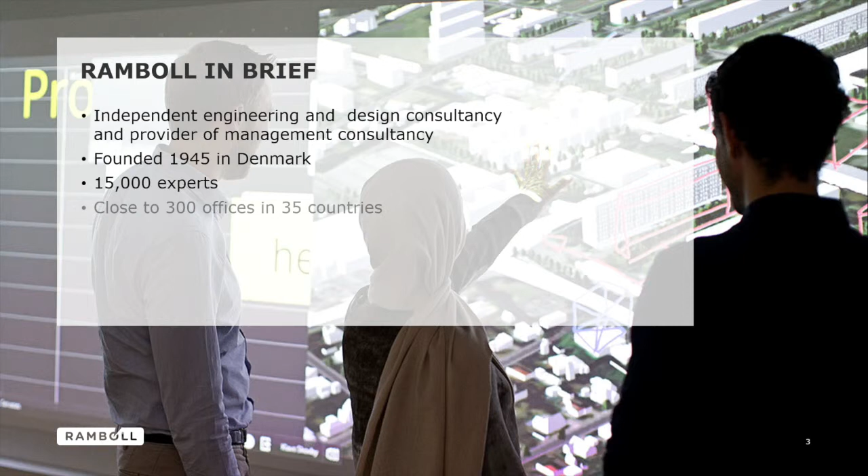So a quick slide just about Ramboll. I'm going to skip through these. We are a Danish engineering company. We do all things engineering, but one thing that we have been privileged to be able to do is work hand in glove with Denmark and with various municipalities, particularly Copenhagen, in helping develop the district heating system that they have over there that we are obviously so jealous of. So it's been going over there for many years. So I'm going to try and bring a little bit of that slant to the UK situation, and then a few projects that hopefully will give you some encouragement and then some challenges.

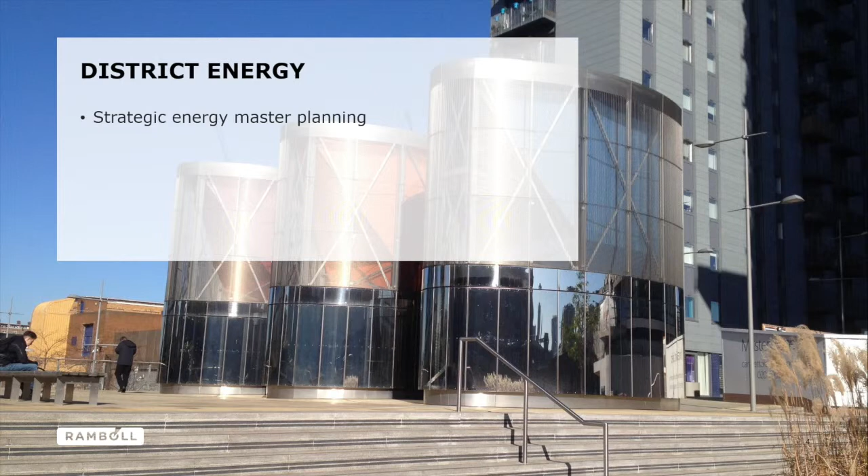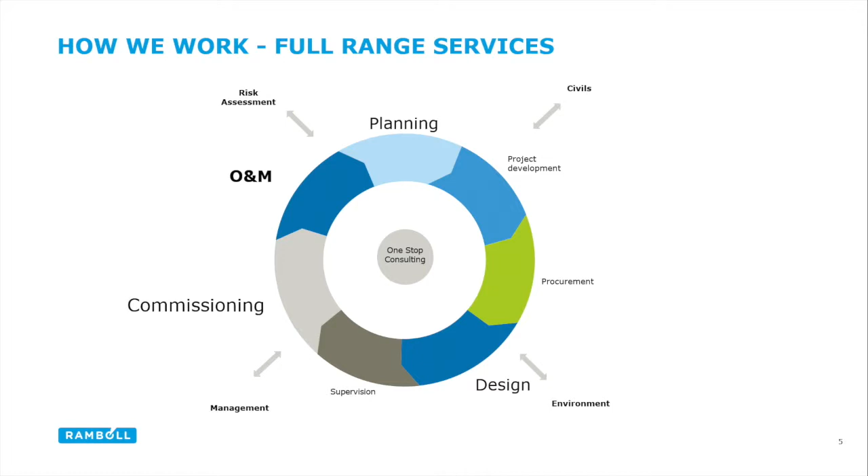And as I said, we do lots of different types of related subjects around energy, but I'm specifically focusing on district energy and particularly district heating. And last slide on the company, because we've been doing this for many decades, yes, we can do the planning that's quite common over here now, energy planning and design work and commissioning, but we also have a particular strength on O&M, and I would always encourage you to think about the operation of schemes right at the very beginning. So that's the sort of holistic service that we provide.

Now, this is my only slide from our corporate PowerPoint pack on all things district heating in Denmark. You'll be pleased to hear we have a lot. But the reason I put this one up is I think it tells pretty much the whole story of what's been happening and what is projected to happen in Denmark relating to decarbonisation and district heating. So you have the timeline starting around 1980, moving forward to 2050. And the black line is the one I'd like you to look at first. That's the amount of carbon per unit of heat used by an end user customer. You can see in the past it was high, and in the future it's nearly at zero over in that bottom right corner. They too have the same challenge that we have about squeezing out that last bit of carbon. But you can see how the line has plummeted and how it continues to drop.

And then the colourful bars show you how the heat is being delivered. The important colours there really are the blue, and that's the large-scale district heating, and a little bit of pink appearing as you go into the future, which is what they call small-scale district heating, which is probably akin to a lot of the ad hoc projects that we're delivering here. So I think there's a pretty clear pattern there showing achieving and projecting decarbonisation and district heating very much playing its part in that. And the last thing to draw your attention to is the light blue that appears around about now going forward, which are individual heat pumps. If any of you are aware of our government's heat strategy, where they have a kind of simplistic diagram of high heat density being met by district heating and low heat density areas being met from heat pumps, there you can see the same picture emerging in Denmark as well.

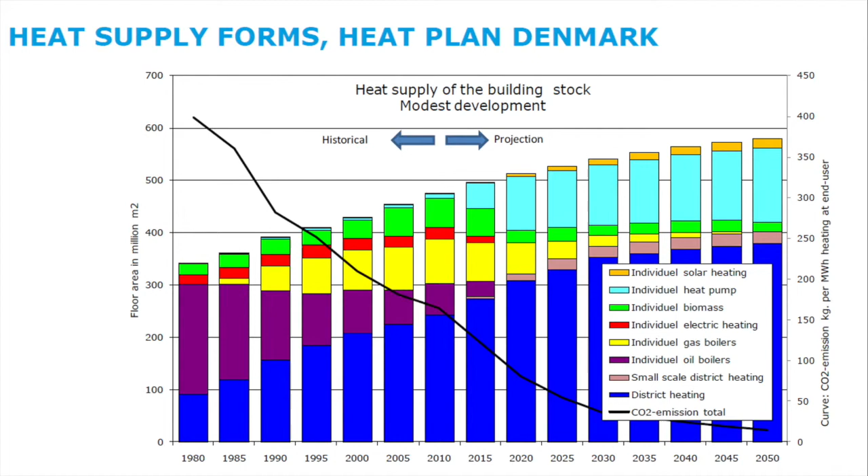So my next couple of slides are around particular projects. And one of them is in Copenhagen. As I said, we're headquartered in Copenhagen. In fact, this is the answer to the question: can we achieve 17%? The eagle-eyed of you in the audience will see 97% there, which I've highlighted in our corporate light blue, so you can't really see that. And that is the degree of district heating penetration in the city of Copenhagen. So yes, you can achieve at least 17% and more. You just have to commit to it, and it does take a bit of time, but it is completely doable.

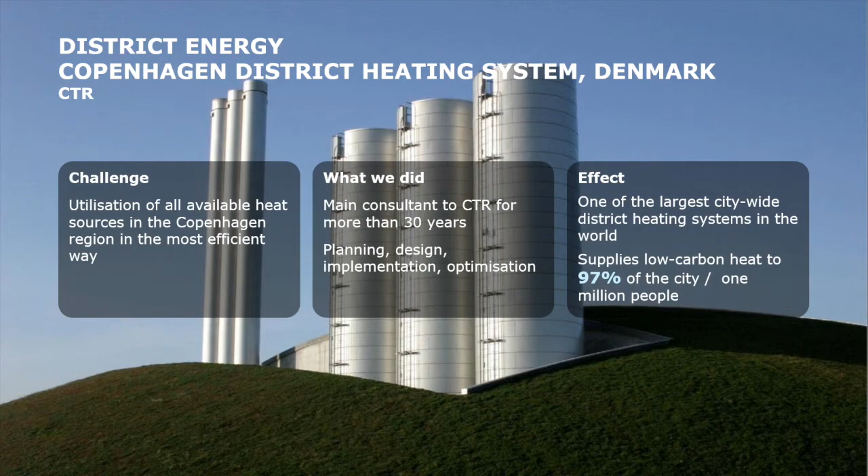This is the only slide I have up of projects in Copenhagen that we've been doing recently. There are obviously many, but I like this one in particular because I think this tells a story that we in the UK can wrap our heads around.

So there is a temptation to say, look at the Nordics, everything's fantastic. Everybody sits around drinking flat whites and wearing funky clothing and having a lovely time, and the world's wonderful. Just do that. Just build that. And if you talk to Danes and Swedes, etc., they say, well, just do this. But that's a really hard task. And how do we start, and where do we take it from?

Now, this is a project. It's just about 15 kilometres outside the city of Copenhagen. They've recently built a new fruit and flowers market, so I suppose a bit like Covent Garden, new Covent Garden here, and that market requires chilling. So they've put in chillers. They've got about 2 megawatts of cooling there, so again, numbers that we can understand.

These aren't massive pieces of infrastructure, and that does its thing, and it's very clever, and it's got tiers of, as it warms up, it supplies warmer areas of the markets. It's all very well designed. But the clever bit, as far as I'm concerned, is what they do with the rejected heat off the back of the chillers. So the left-hand side represents the cooling side of the system,

and then they've bolted on heat collection and heat pumps onto the hot side, and then they lift that from around 16 degrees up to the transmission system temperature, and off it goes into those red lines on the map there of the transmission network in Copenhagen. And it's just over 3 megawatts of heating. So again, nothing massive. It's a sort of scheme that we have done and we can deliver here in the UK. The waste heat temperatures are the sort of temperatures that we're looking at across the piece, and I'll come to that in a second.

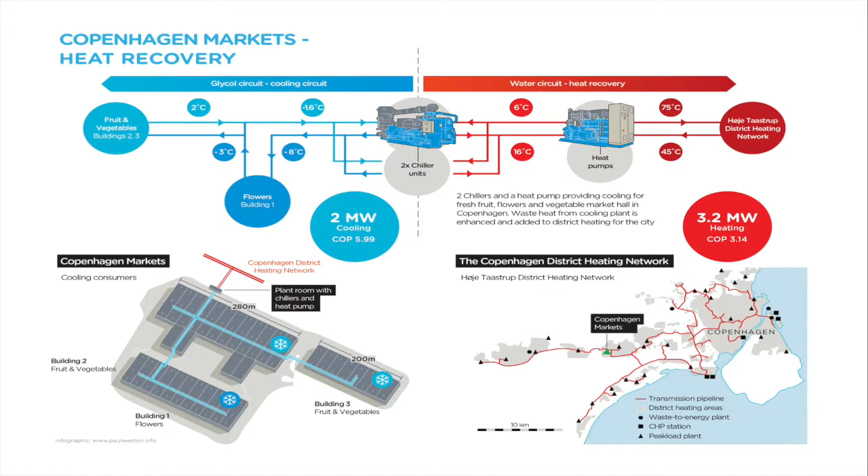I suppose what is revolutionary, though, is why they located the markets where they located it. They put it on the heat pipe so they could use that heat. So that joined up thinking happened right at the start, rather than having a facility and then you're trying to pipe heat to where it's needed. They have a network, so they have that advantage over us, but they decided to put this new piece of infrastructure there, so then it is relatively easy. So is that deliverable, and is that relevant to the UK?

Well, this is a fantastic study that, if those of you don't know about it, I would recommend that you have a look at. It was done by Buro Happold. I have no say in this at all, for the GLA a few years ago now, but it mapped all the secondary low temperature waste heat, available heat across the City of London.

This is a rather badly reproduced summary here of the sorts of places that you can get heat in London, and this is true for any city, a large town, even small towns have these waste heat sources, and you'll see chillers on there like at Copenhagen. You'll see the sort of temperatures, size of heat pumps that project represents. So this is very much available now, and people are starting to exploit it.

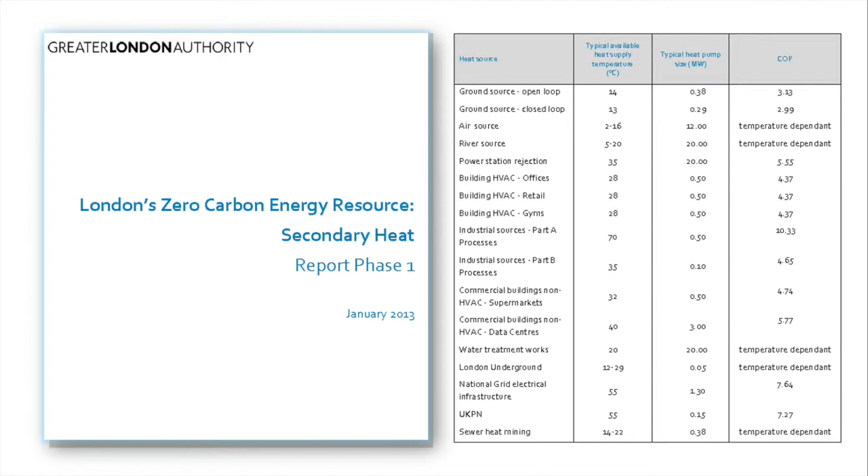And this is a project very close to my own heart. Those of you who know me know that I've been at Ramboll for about a year. Before that, I was at Islington Council. I am really proud to see they've got a stand here. I think they might be the only local authority here today, so go and look at the On Energy stand after this, see my old team. And at Islington, they've been looking at waste heat quite seriously, as well as district heating, for some years now.

And the phase 2 of Bunhill, they've got a lot of information there, is coming to the end of construction, and that will take heat from the London Underground, from the Northern Line, which those of you who have ever been on it know it's quite warm, and it gets very warm in the summer. Very complicated project, very ambitious project, but it's happening, it's being built.

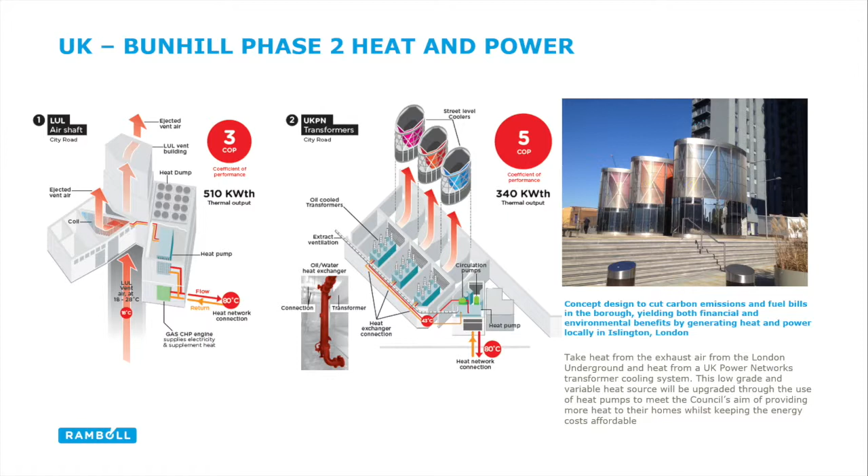Ramboll have been doing the engineering for that. They also have looked at UK Power Networks transformers. There were some technical reasons why that couldn't go ahead, but the heat provision was all there. It could have happened. They've been looking at the canal, data centres, boreholes, etc. So go quiz them about how you do that now in London.

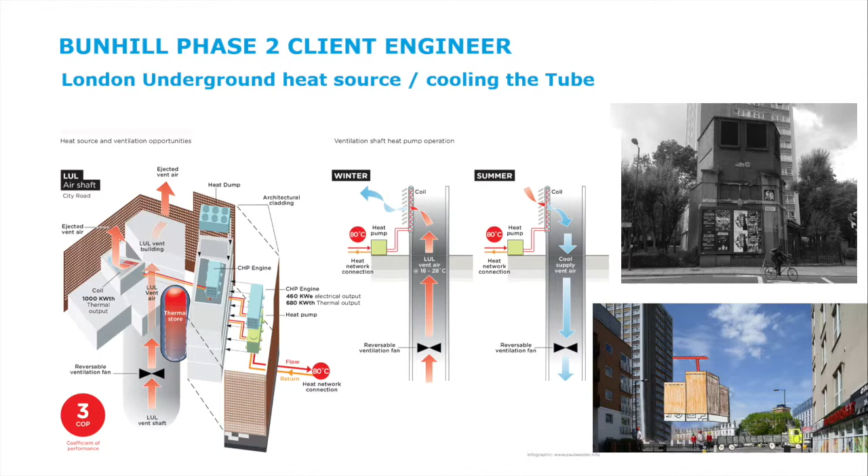and putting it in a pipe that's going off to a number of council and private sites and buildings, some perfectly traditional 1960s, 1970s UK housing stock, so having to meet all those demands. And hopefully in the summer the system will reverse and cooler air will be put into the London Underground. So obviously Transport for London very excited about that. So that project's happening just a few miles away from here.

And then another project happening a little bit further north is in Glasgow, in Queen's Quay, where we're helping them look at waste heat recovery, but using the River Clyde this time, which I think is a little bit colder than the Northern Line. I've never been in the River Clyde, I take their word for it. But again, as in the Nordics, using large heat pumps to take heat out of a water source. And that project, it's a bit earlier stage, but that project is underway.

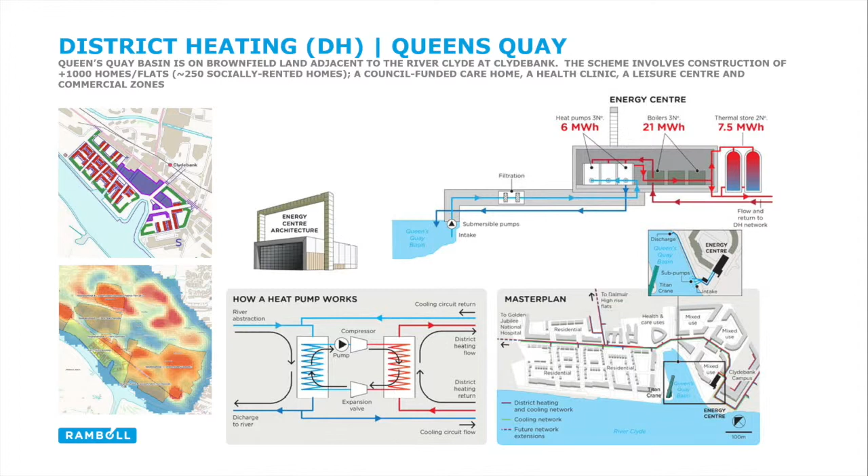So that's all the good news, that we're doing it and it's doable, and then a few challenges. So I'll come on to a few challenges. The first slide I thought I'd put up sums up a lot of what our challenges are, I think, which is the degree of individual gas boilers that we have here. People very, very happy with them as a heat source, and therefore, why move off them?

Huge investment in infrastructure in the gas network and all those boilers. And you can see, compared to a lot of our other European neighbours, the UK is way ahead. So we have quite a challenge in changing and transforming this infrastructure.

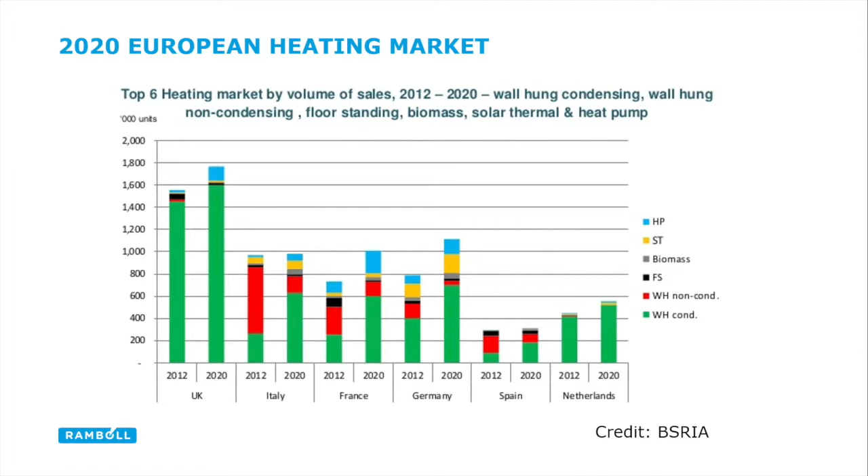And so I've summed up here four challenges. Actually, I think since I've written this, I've changed my mind a bit and I disagreed with myself. They're challenges, but they're also possible solutions. But in order of magnitude, I think this is for you to agree or disagree with and to continue through the session. But policy, I think, sits at the top.

Why has Copenhagen got to where they're going? They made some decisions about how they were going to provide heat to the country, just like we have here. But they made a decision to go for district heating, and they are where they are now. We have got some clear drivers in some parts of the country. The London Plan, for instance, has got a lot about district heating and has done for some years, and it's no coincidence that the largest number of district heating installations are here in the capital.

But it's not an integral part of urban planning, and it's not on an equal footing with other infrastructure. And I think until that happens, it's not going to be. And just to show, I think, the impact of that, just to duck out from that slide for a moment, those of you who, like me, have been around in the energy industry for a while will remember the transition from non-condensing to condensing gas boilers.

And for years, everybody was trying to persuade people to get really excited about condensing boilers. And it was clear as anything that they would deliver savings, they'd be cheaper for the householders, they'd save carbon, they were fantastic. But I think there's an inescapable truth that most people, us here excepted, are not at all interested in this. Most normal people, and I may be offending you all now, aren't the slightest bit interested really in their boilers or where heat comes from. They just want reliable heat and they want it to be as cheap as possible, please.

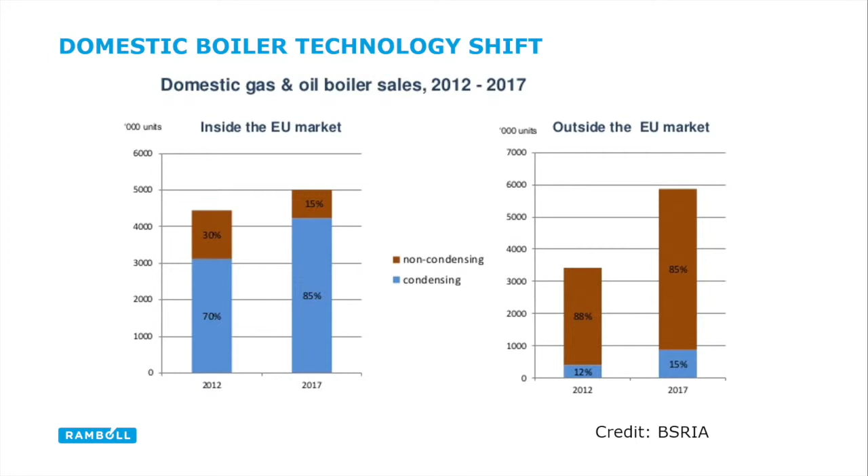There's a great busy slide, quite shocking lack of uptake. But it's flipped the switch overnight here, and so I suppose I am a strong advocate that sometimes there isn't a market pull for some of what we're trying to do, so some of it has to be pushed. And then just to go through it, in my view of possibly lower orders of magnitude, this issue of user demand is a really big issue, I think, for us.

We are currently approaching the rollout of district heating as a market development. There is government money on the table to help kickstart and grow that market, but the theory is a market will come along and this will happen. But most markets happen because people want the product. We've all got smartphones because we really want them. You just have to have literally a new colour of smartphone and people will queue up overnight. They want that smartphone.

My challenge is I don't think anyone will ever do that with heating, and I think if we pretend that they will, we're going to have a broken approach. So this has to happen for other reasons. If there's no pull in a market, there won't be any push of supply. Money is vitally important, of course it is, and we're competing with other utility infrastructure that's long paid for, generally by the public purse, and we don't have that infrastructure. So money is vitally important, and government has put some great mechanisms in place.

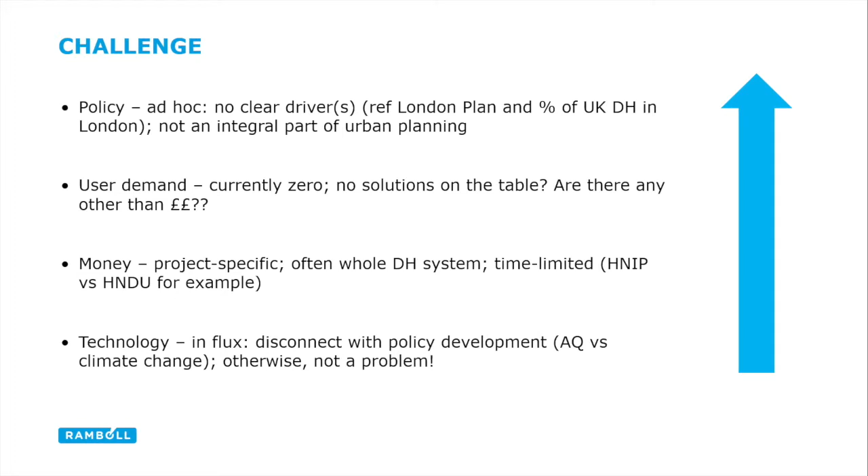And then I put at the bottom, and I'm an engineer, so it pains me, but I put technology at the bottom because actually generally I don't think technology is a problem. I think we have the solutions, we know what the solutions are, they're tried and tested, we can build them. It's in flux at the minute because we've relied on gas CHP, and that is changing, so that adds to risk, but I don't think that's the big deal. Now, I know I'm short for time, so I'm just going to wrap up on one last slide. So they are potentially solutions, I think, that I just put up.

I think really the challenge I have is I don't think we're going about the development of district heating projects in the UK in quite the right way. I think we're scoping them, we're putting a boundary around the whole project, pipes in the ground, energy, heat sources, the consumers and offtake. We tend to have to look at the whole project and make particularly the economics work right across all those areas. You'll all come up with lots of examples probably and say, no, I know of lots of projects where you're not, but generally that is the way of it.

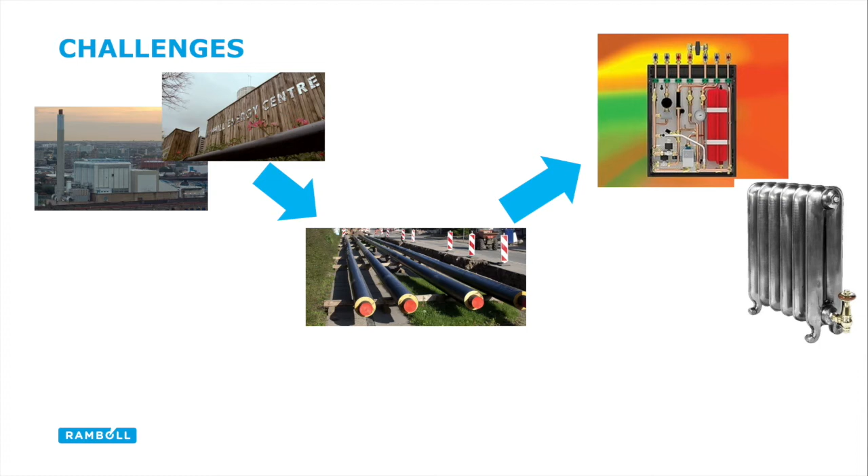And they all have their own challenges, they all have their own risk profiles, they need different levels of policy intervention, financial intervention, etc. So I think seeing it in the round means we are nowhere near approaching the right sort of clarity to make these projects work. And just to skip through, pipes, well, we've already got gas in the ground, and people are perfectly happy with their boilers. Why would we pay for this? Heat sources, there's no incentive to build, there's no incentive for existing heat sources to sell their heat into networks. And again, project-specific investment, I think, is illogical.

And then back to what I said earlier, end users, are there incentives to connect? I'd argue that there are no solutions on the table, so you have to do some sort of commercial deal to undercut those existing, well tried and tested and invested in heat sources.